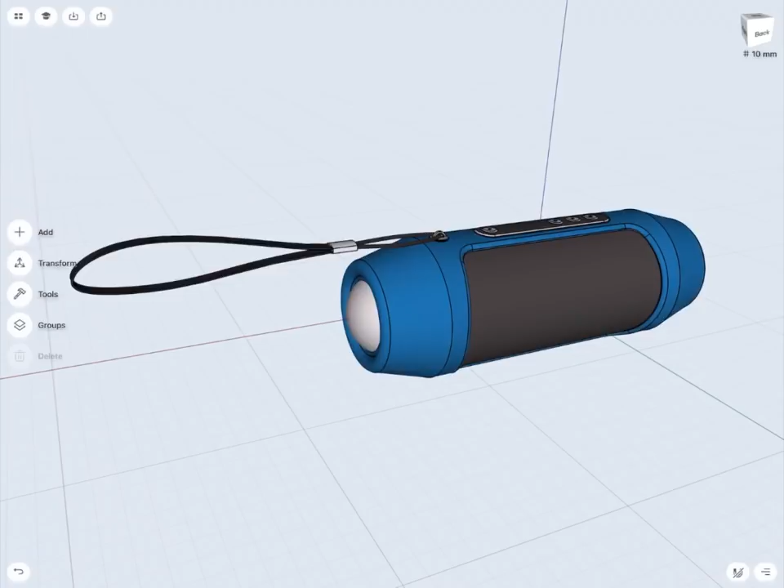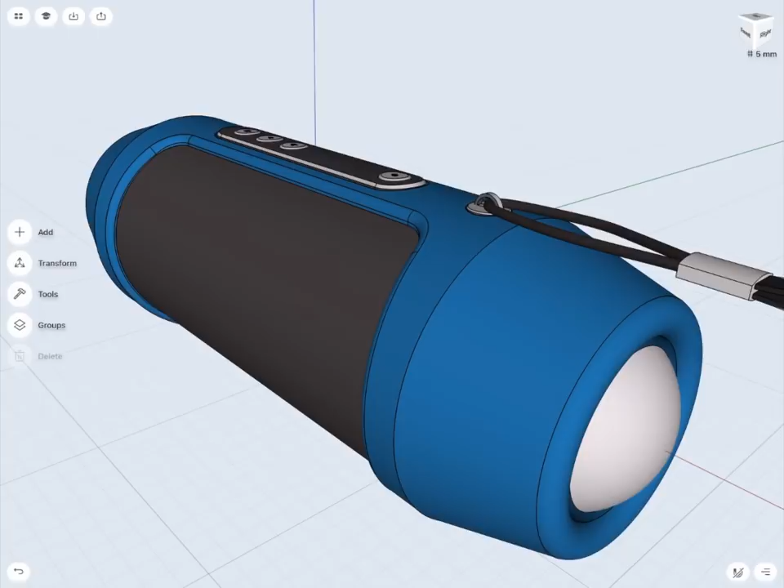We're going to go through a couple of stages and repeatedly use them to make different parts of the speaker: the speaker itself, a safety strap, and a control panel. We'll use extrude commands, revolve, sweep, and loft profiles on the sketches we make. We'll learn how to use a coordinate system to operate our design, and also use planes and modify them to draw sketches on them.

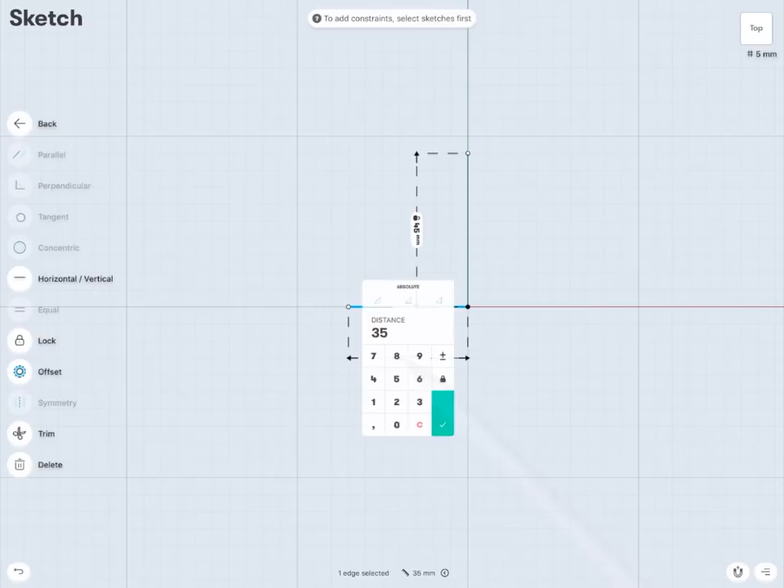Let's start. First we're going to open a new file and start to make our speaker profile. I'm not going to make a whole speaker, so I'm going to use the Revolve tool. Just half of it is enough.

You can use dimensions as I did, but you can also measure your own speaker if you have one at home and try to copy it. So basically all we need is just a quarter of our speaker, because it's symmetrical in two ways, in two axes.

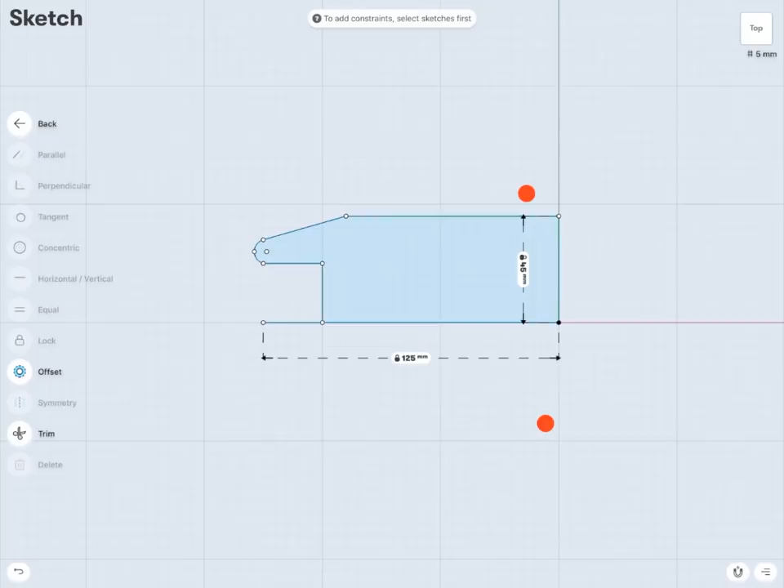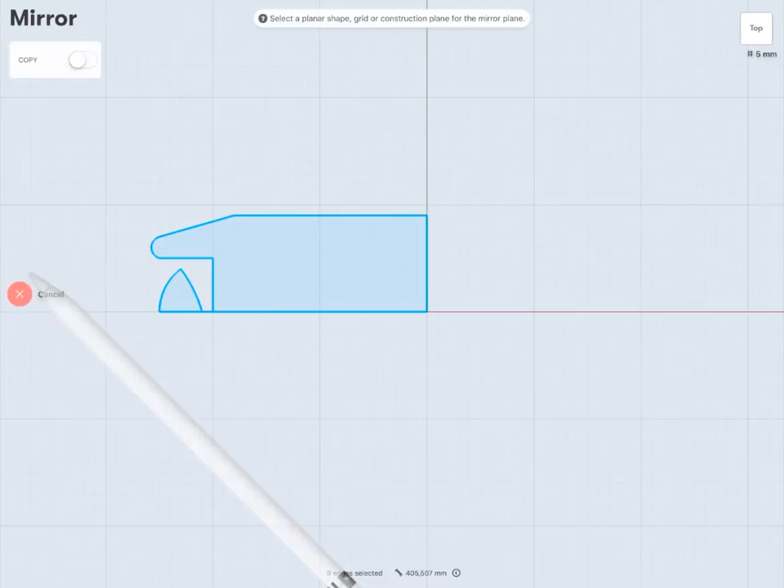The sketch I have right now is actually enough to start making the speaker. Now I need to make a mirror. Be sure to select copy from the top left box, as here. Now you can use the Revolve tool to make the shape of your speaker.

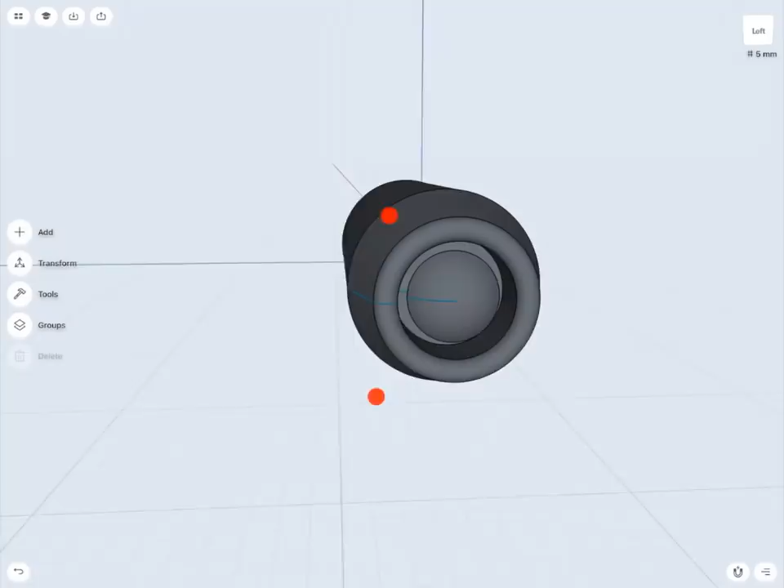So now we've got it. This is the basic shape of my speaker. I think my bass speakers are a little bit too small, so I will delete one and try to scale it a little bit.

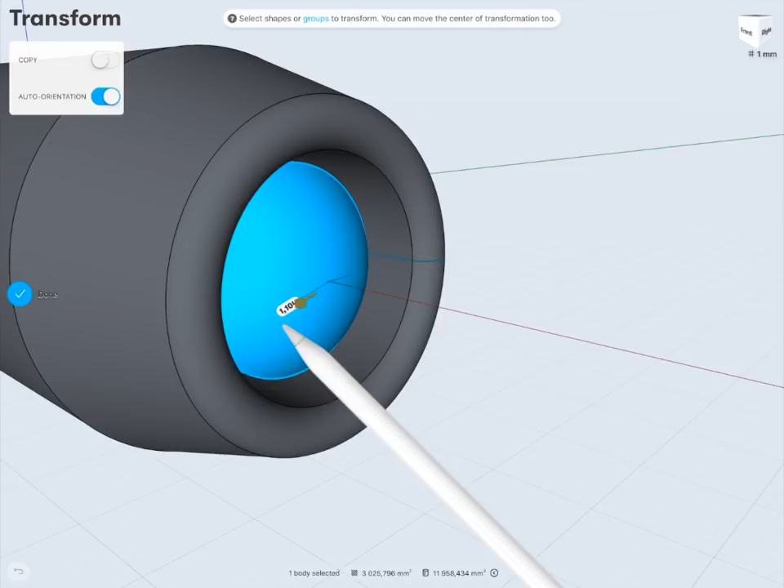I have to put my center of transformation inside my shape because it's round. Then I'm going to scale according to that point. This is important because otherwise you will lose your symmetry. I'm happy with that.

Now I'll create a line. As you probably spotted, I've put this line on axis, and this line helps me make a mirror of my bass speaker.

Now I need to put the bass speakers on a layer because I don't need it right now. If you want to rename a layer, you just need to swipe your pen to the left, and then you're able to change the name.

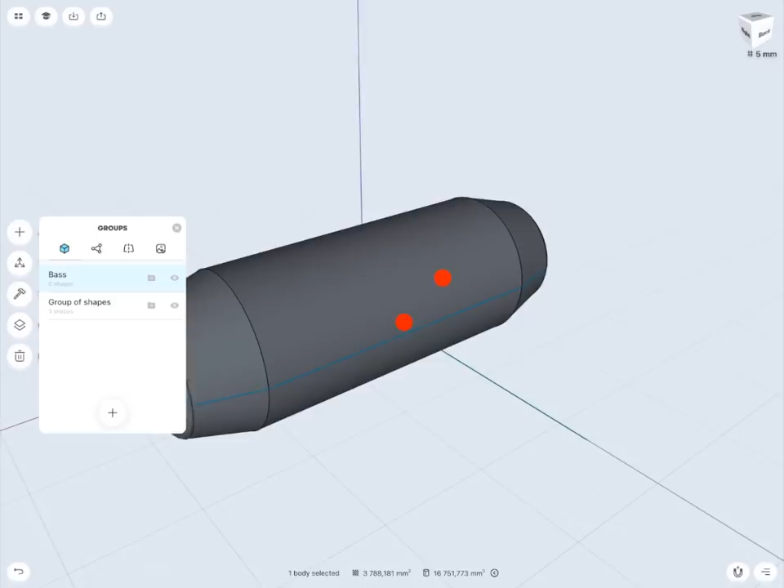For future purposes, I'm going to create a new layer, and I'll call it cut tool. So from now on, anything I create is going to be a cutting tool if I'm selecting the groups, for example. You'll see later how it works.

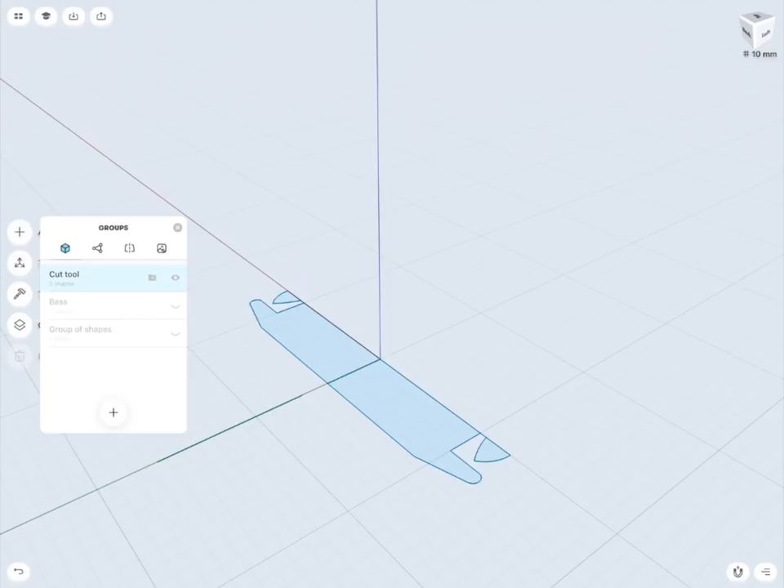Okay, let's start to create the speaker shape. This is going to be a profile of my speaker. I'm going to adjust it a little bit, and now I need to mirror that because I need it to be symmetrical.

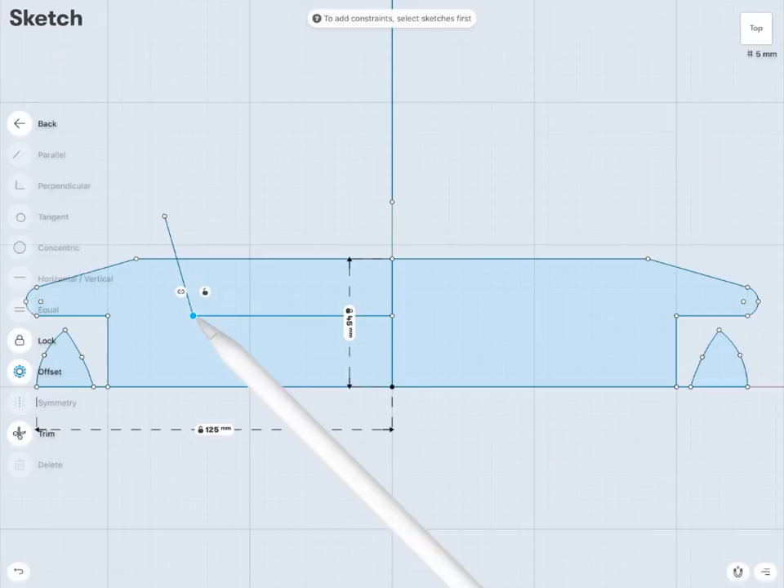Don't forget to select copy from the selecting box. Okay, we're done. Now I'm going to extrude that shape.

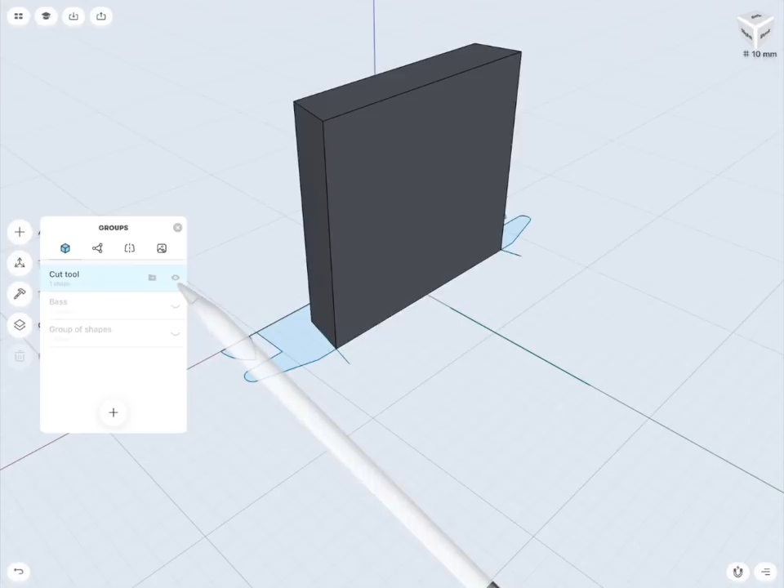As you see, it's placed on the cut tool layer. If I unhide my speaker, I'm going to use it as a cut tool to cut from my speaker.

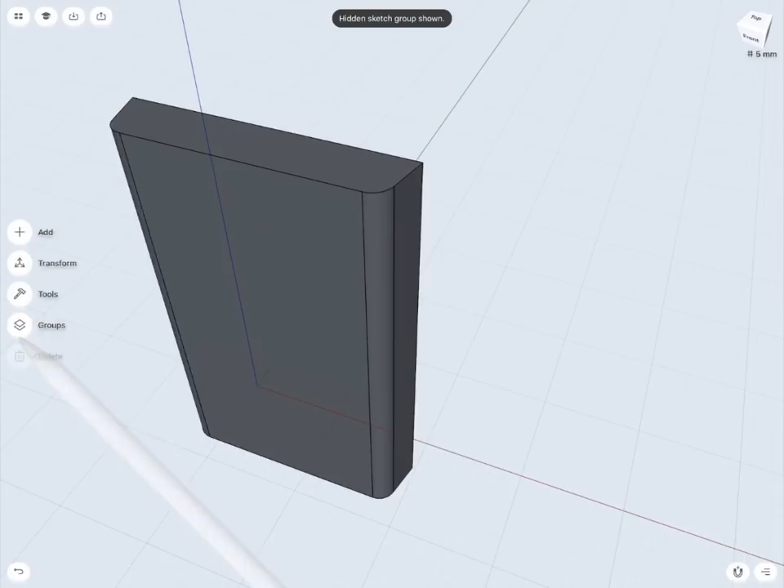I think I'm going to add a little bit of filleting because it's not that sharp. So I'm going to fillet that, and then unhide the speaker.

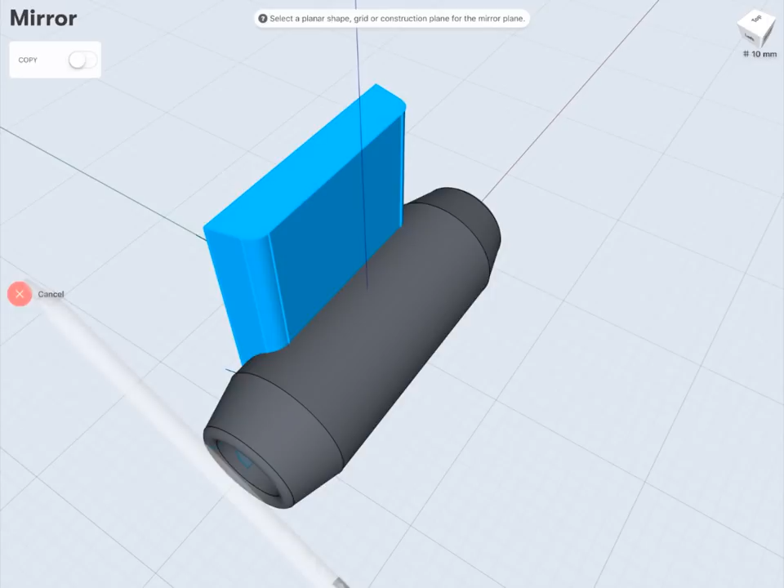Now I need to make a mirror to the other side of my symmetrical speaker. As a constraint to help you mirror this, you can use existing sketches or an existing line, as you see right now. I've used the sketch I previously made.

Now I can subtract, but remember: first select the object you are subtracting in, and then the object you are subtracting with.

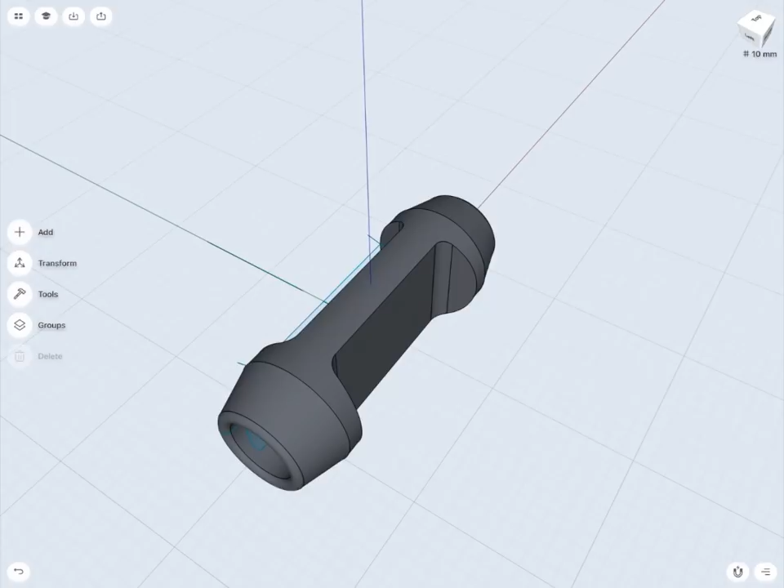Now I'll create the round shape to make it infill like a net of my speaker, aligning it according to the speaker. As you see, it's actually automatically snapping.

I like to lock the middle of my sketch, so to do it I just need to select the center of the sketch and then press the black lock. Then anything I scale, which I'm doing right now, will be according to that point. So extrude it, just press and pull.

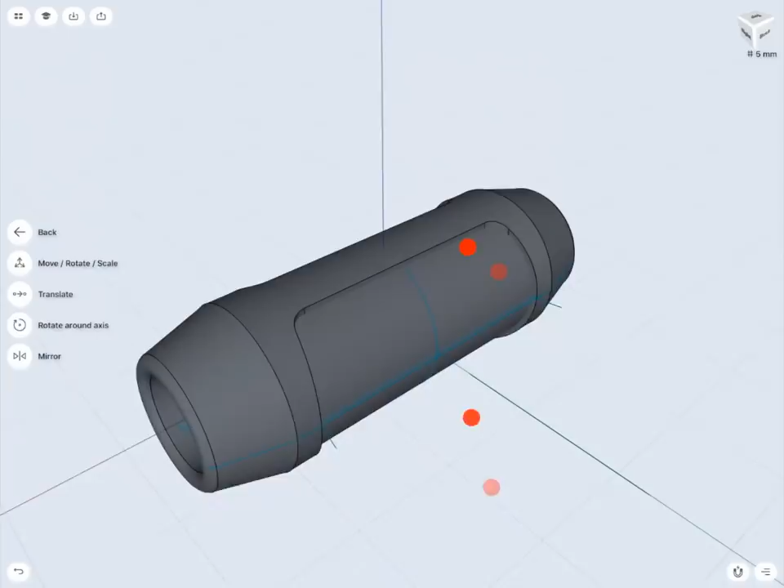Now I'm going to select the edge of my speaker and make small fillets. As you see, you don't have to select the whole loop, you just need to select one edge of it, and then the selection is automatically applied.

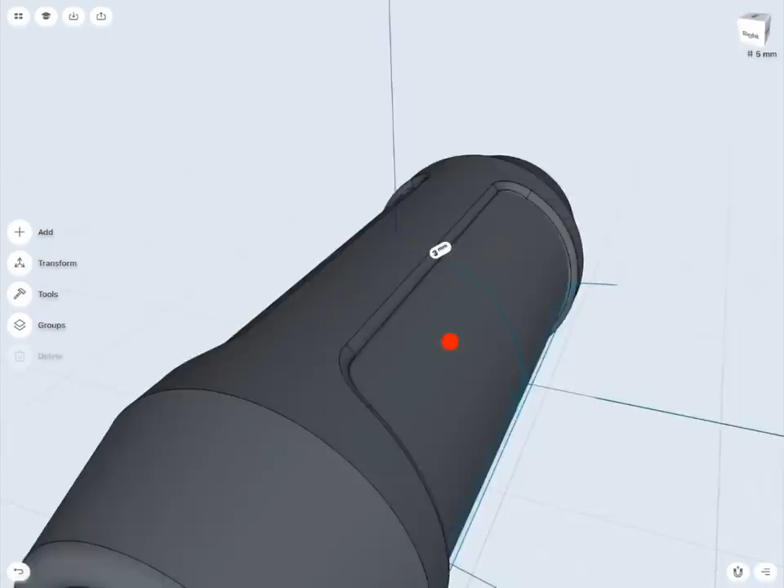So now I just need to merge them all together. To do it, I need to make a union, and now it's one part. So my speaker shape is done.

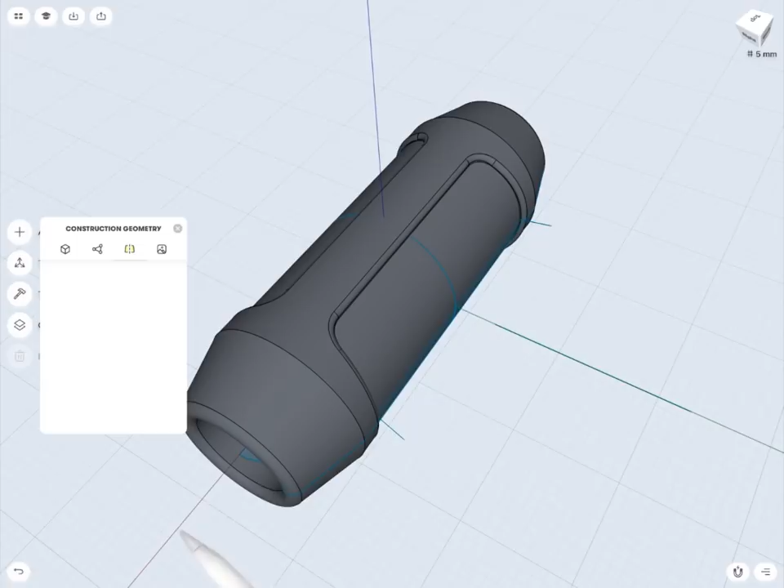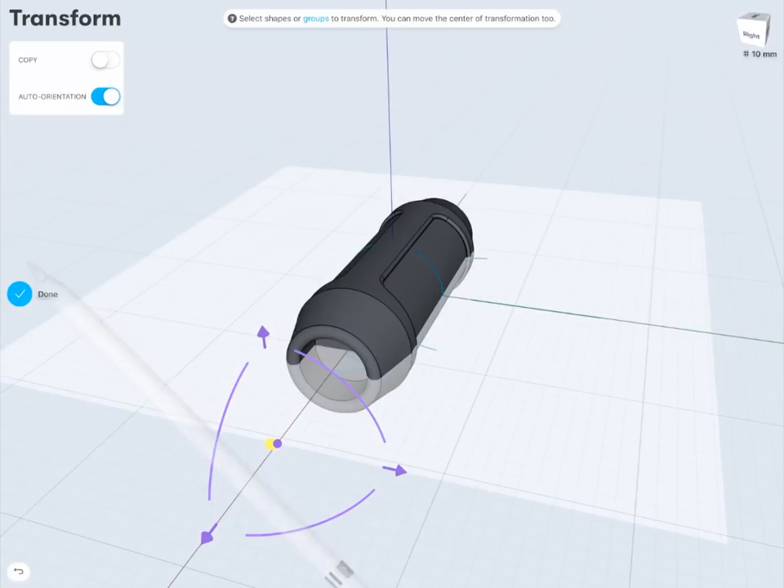Now I need to create a control panel. To do it, I need to create a construction plane. To do so, I will create the line, and out of this line I'll create the plane, and I'll do it through edge by selecting a certain angle. I like that feature of moving planes anywhere I like.

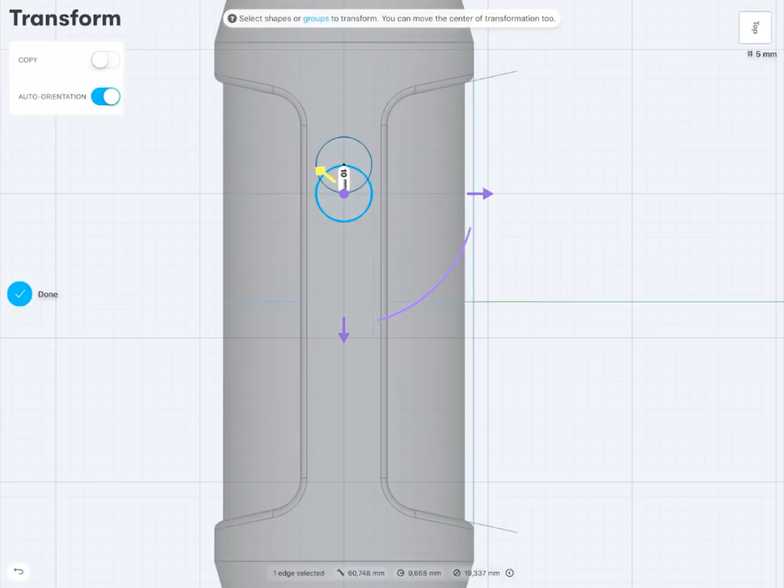It helps me to make sketches wherever I want. So in this situation, I'm going to place the panel. First I'm going to create the base, which is the very long bar, and on this bar I'm going to place 4 buttons, which is stop, play, forward, and turn on off. A little bit of trimming.

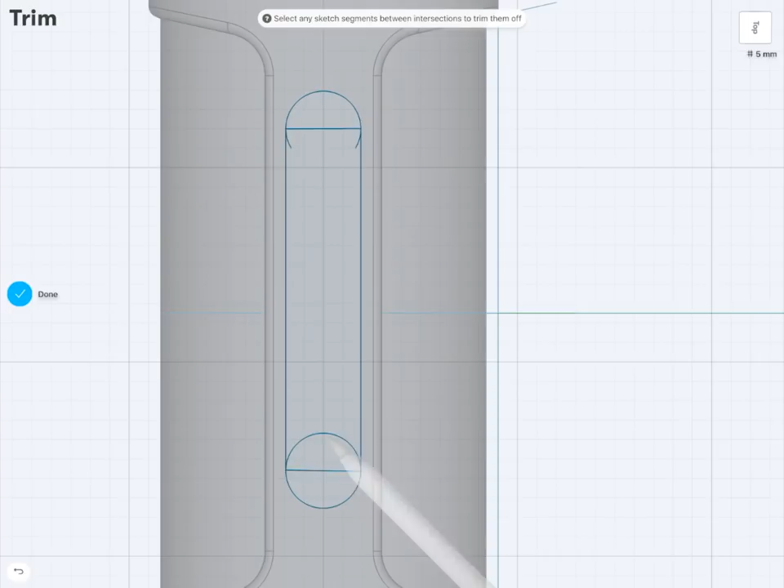So what I do right now is offset. I've created this shape, and I'm going to make a very tiny gap, which is a very technical gap.

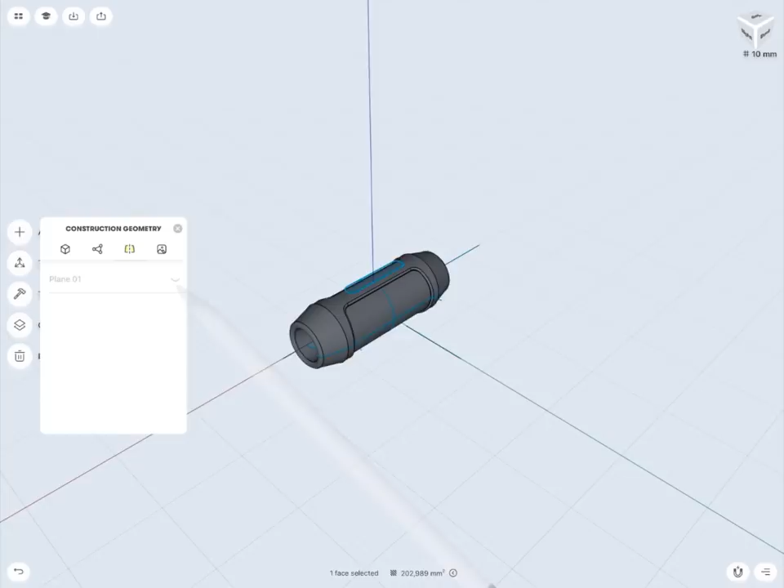And I'm going to extrude that, and I'm going to subtract it from the speaker. And then I'm going to adjust the height of the leftover in the middle bar, as you see right now.

So I'm going to select the face of the inside shape, and I'm going to pull it a little bit up to make it higher. At the end, I'm going to chamfer by pulling the edge using Apple Pencil.

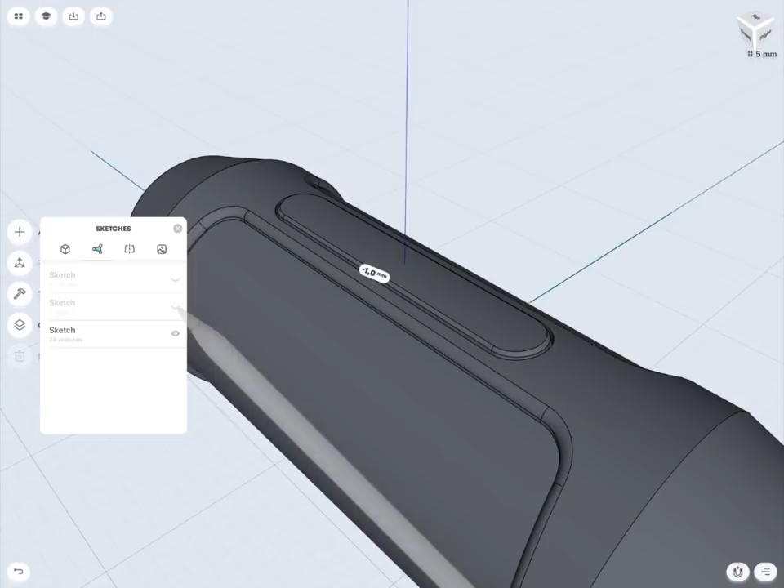I can't make a button sketch straight on the panel face because it's not planar, so I need to reuse a previous panel sketch.

I'm going back to my sketch to add some more shapes. I'm going to create a round shape, a circle.

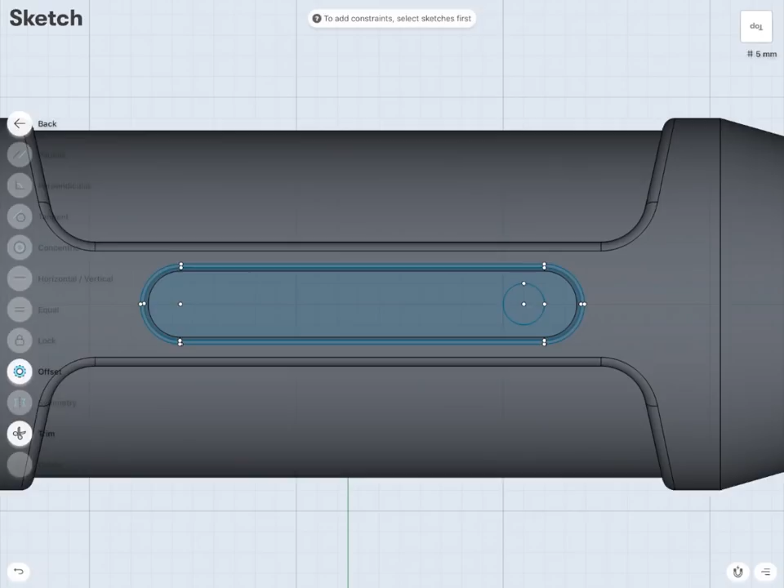I'm going to copy them 4 times according to the same gap, and I'm going to make an offset to create shapes which I will use to make technical gaps.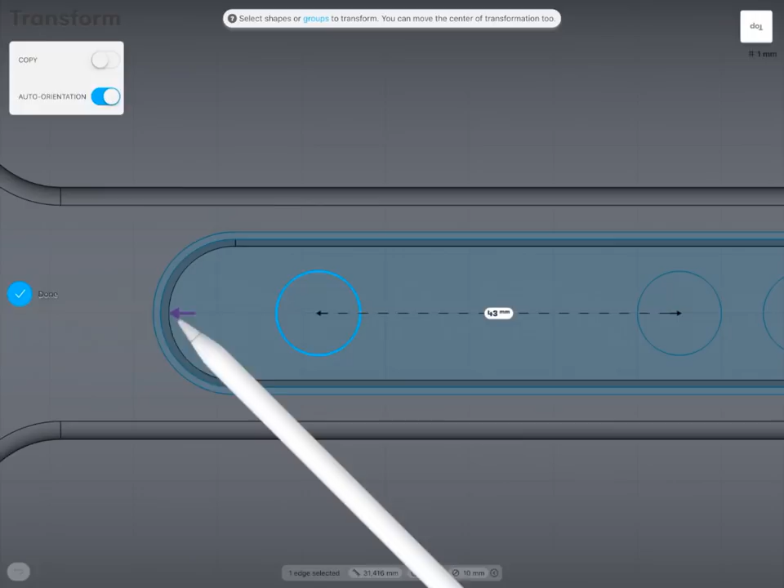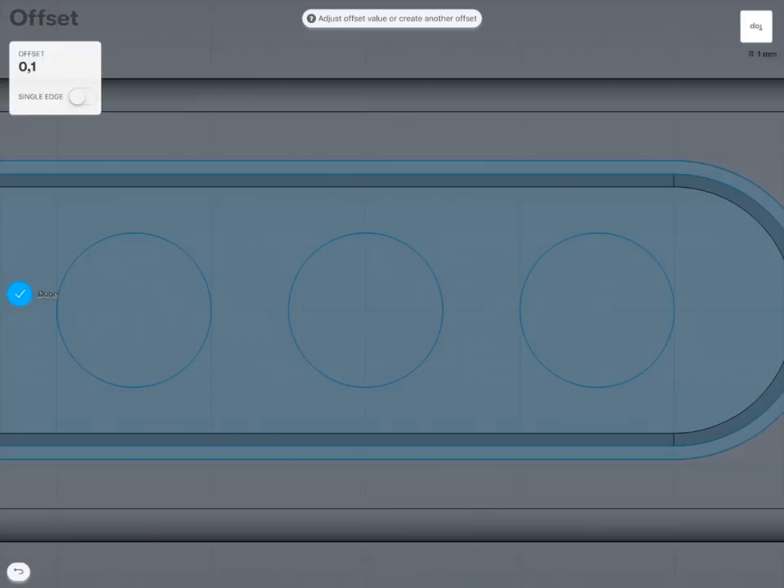So most of the commands, as you see right now, have this number box on the left top corner where you can place your specific dimension, very accurate if you need it. And this will actually keep your design as you want it to be, and very precise.

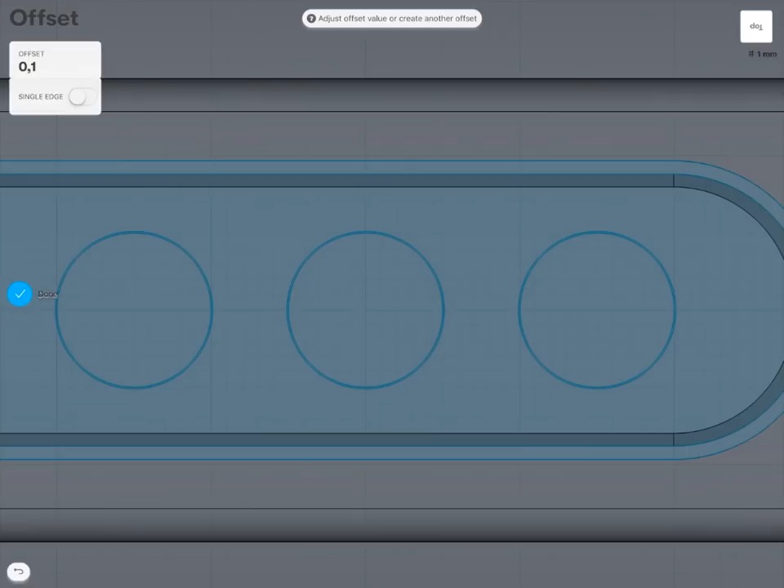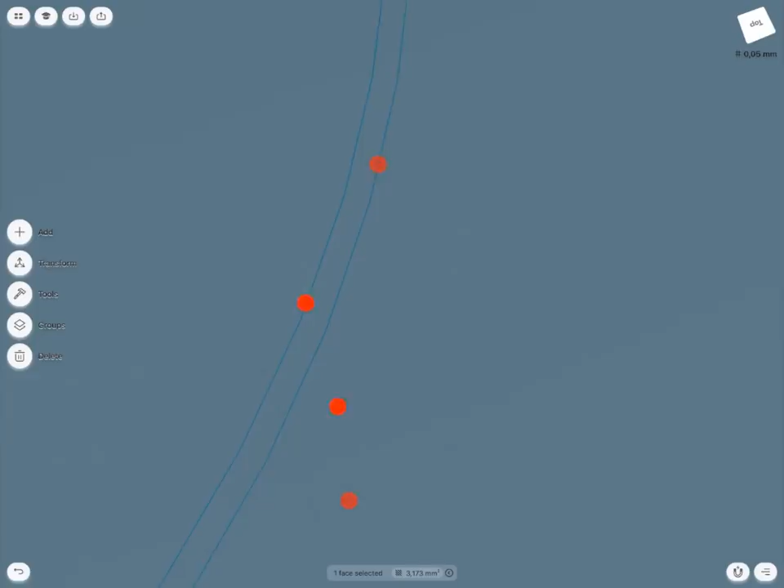So another feature I like in Shapr3D is actually zooming. I like this two finger zooming. You can zoom in very close to the objects you actually want to select, and then zoom out and actually move at the same time. And you can do it very quickly and very efficiently.

So as you see, I'm going to extrude it right now, the same as I did with the bar. Anything I've created is on a top layer, which is the cut layer. Now I will show you how to cut using groups.

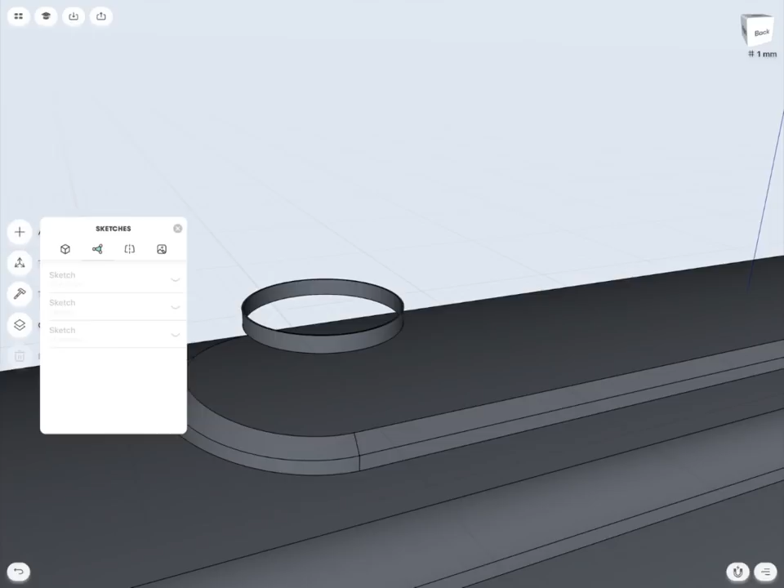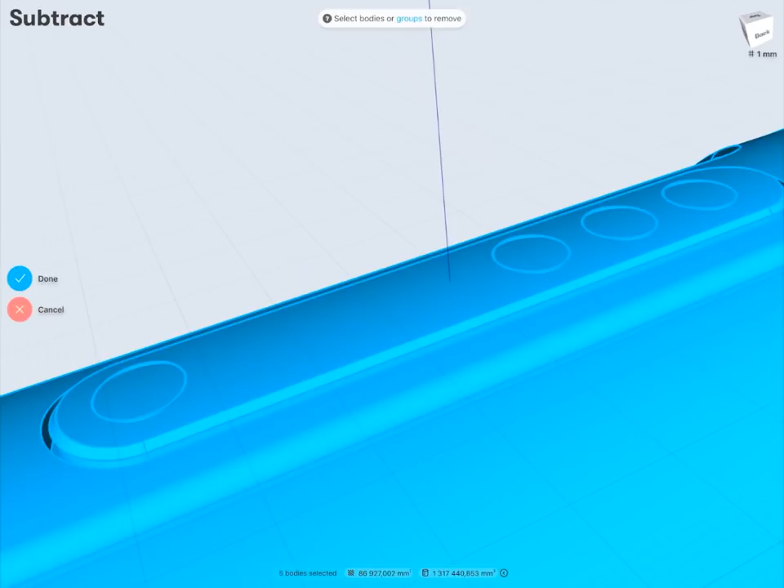So I need to transform these shapes a little bit towards the bar. I've actually used the group to select that object, and then I'm going to subtract, and as you can see right now, as a cutting tool, I'm going to use the cut layer, which is a layer that contains any cutting object.

And now if you get closer, you see what I've done. It's a small gap between the button and bar. And now I'm going to select the edges of the buttons and make a fillet.

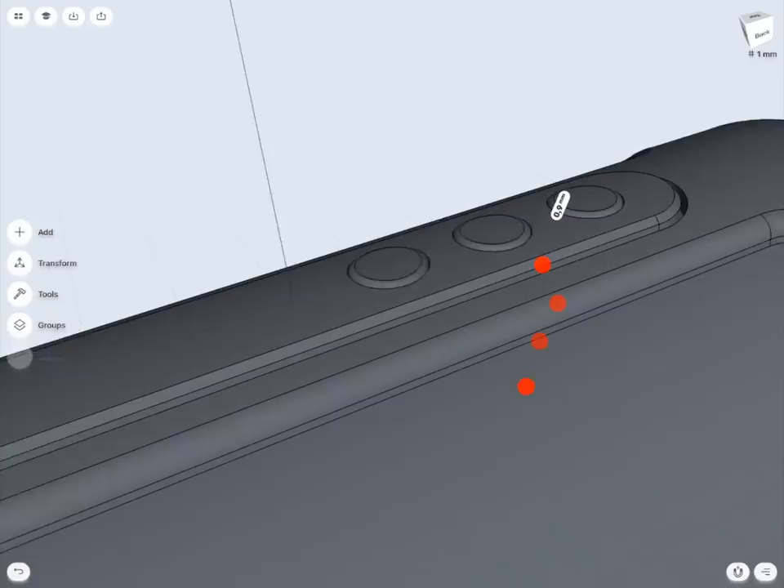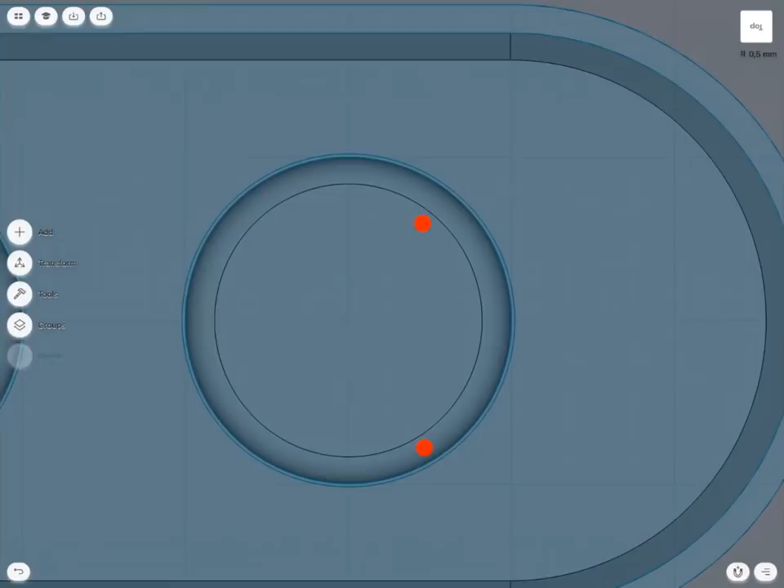So I'm going to recall my sketch, which I've been using to make all of this design. Actually, you can make the sketch in one go at the beginning of the process, but sometimes I prefer to follow my imagination and do it one by one, as you see right now. But it depends actually on you.

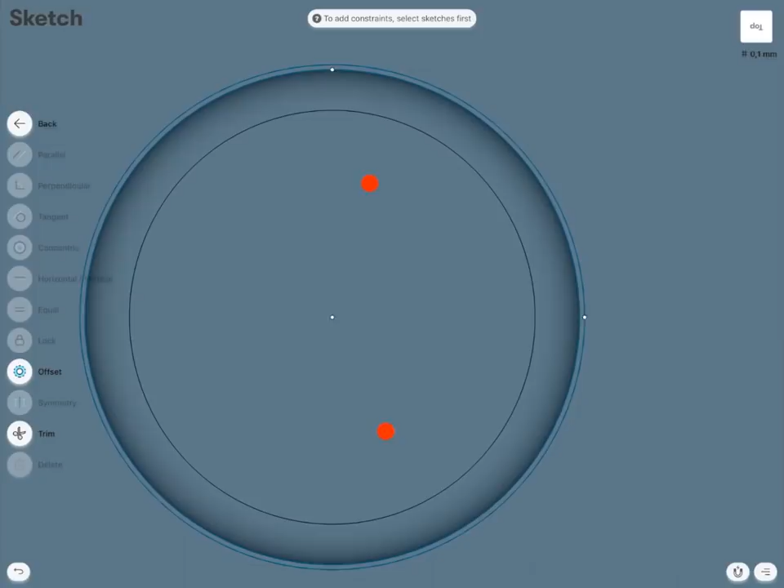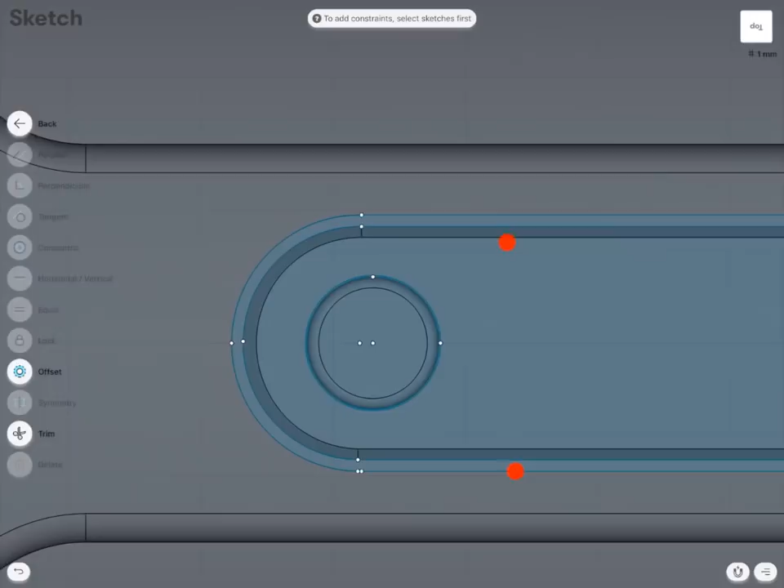So now you see how easy it is to sketch just simple geometry. If you have your snapping on, it's just drawing. But if you see on the right bottom corner, there's like a magnet logo. You can switch it off if you need to make it more freestyle.

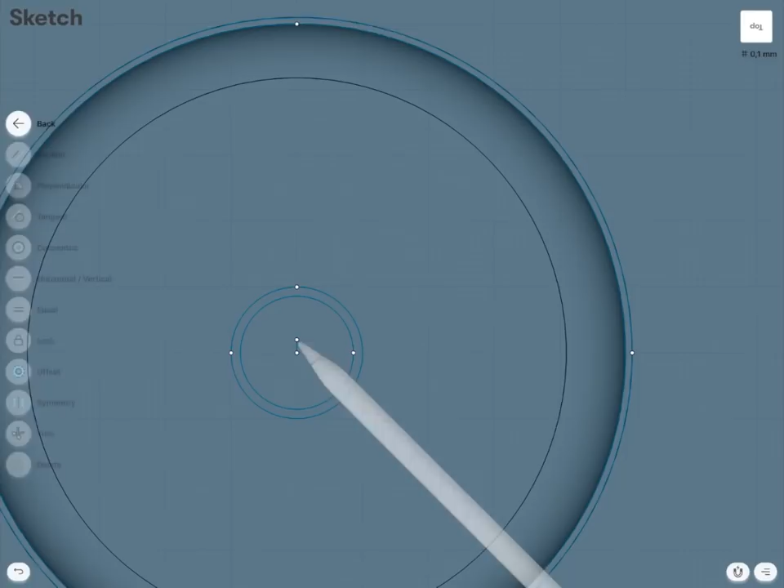So basically the sketching is very easy because all the time you're using the same tools, which is creating line, creating arc, trimming, offsetting, and basically this is it. Sometimes you're making mirrors, but this is from the transform tools.

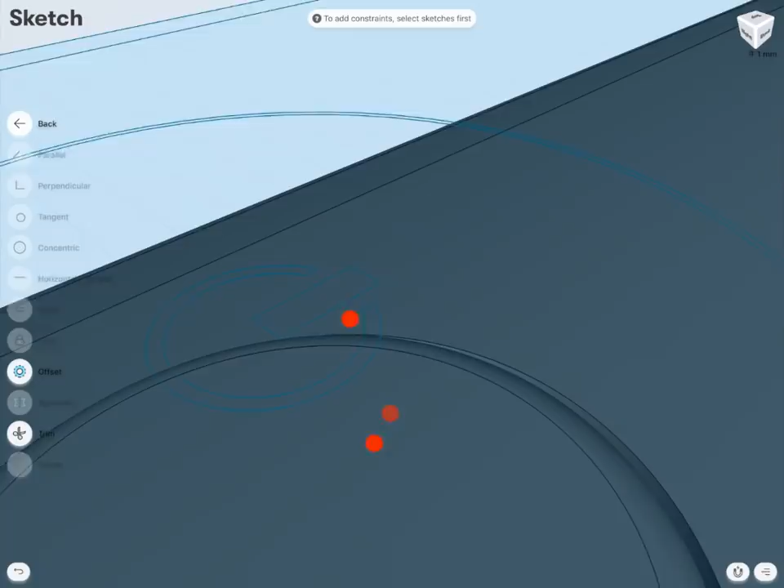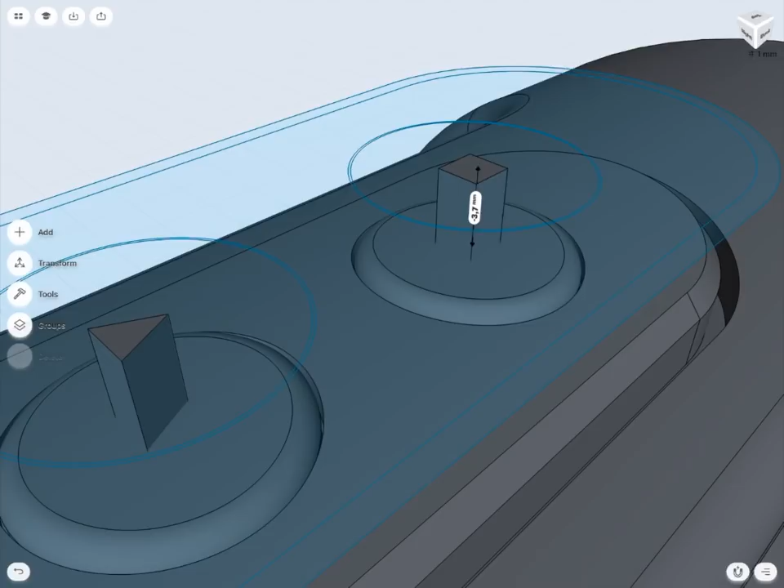So I need to select anything I've created and extrude it just by pulling. You just hold with your pen on the screen and pull down, and this is going to be extruded. Also, as I mentioned earlier, anything I've created right now is placed on a cut tool layer.

So now if you're subtracting, you just need to select the group from the top, as I did it right now. So it's done, it's so simple. Okay, the panel tool is basically done.

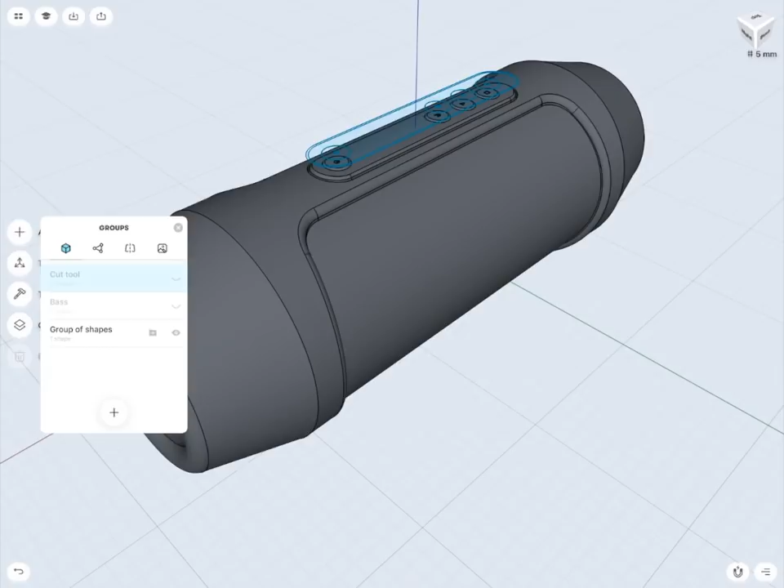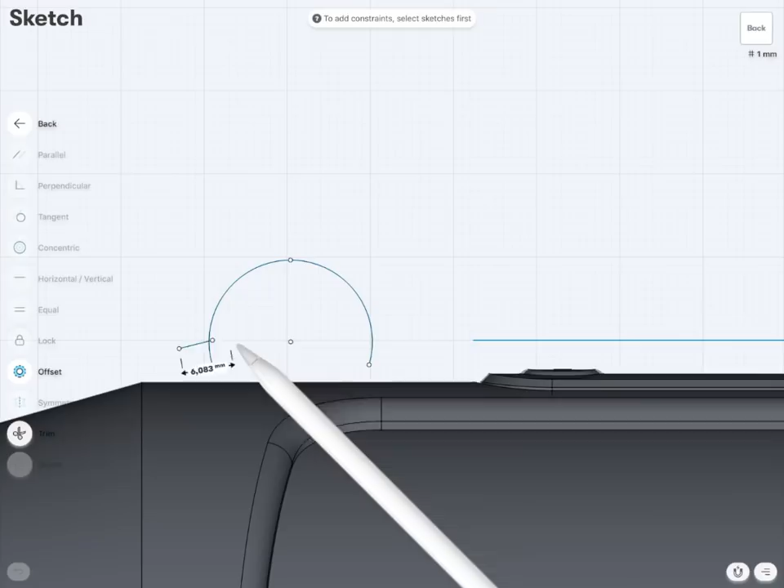So now I need to create a safety strap. To do so, I will use the construction plane I've already used before. So now I'll just rotate this according to zero point, as you can see. And now I'm going to double tap on the plane, and create the profiles to make the mounting strap solids.

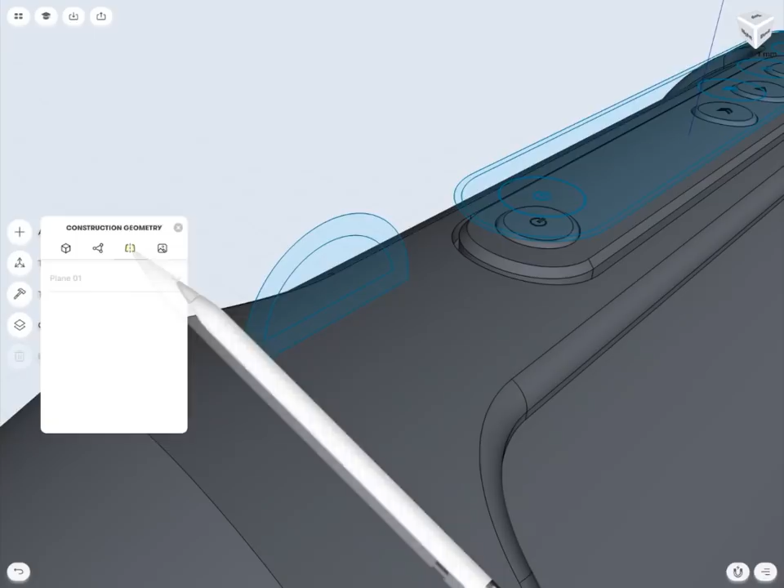Basically anything I'm doing right now we already did on a previous design. So in a kind of conceptual process, I don't care to be really precise. I prefer to do and then to transform.

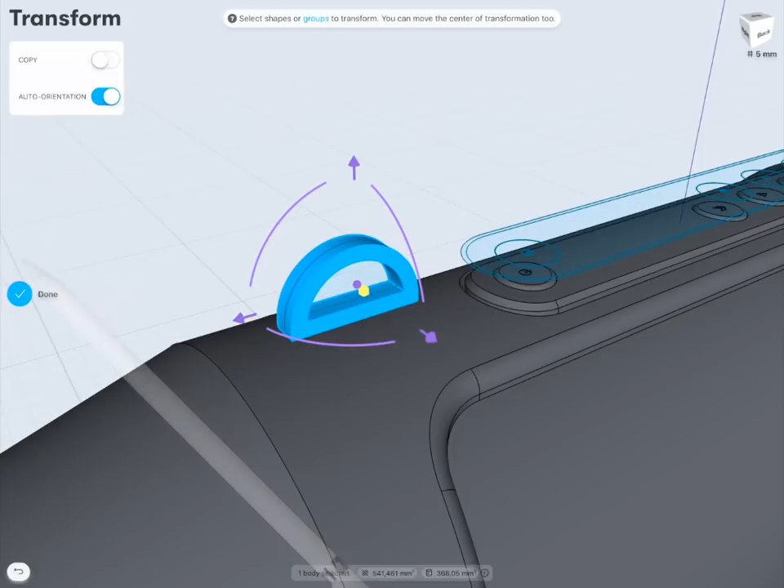So as it is right now in this situation, I create this mounting object, and then I'm going to transform it a little bit. So you can do it anytime you like. As you see, it's a little bit too big, so I'm just going to scale it according to the center point of the edge, the middle point of the edge.

So I like to do it because it kind of frees my mind. All the time I need to change something, I'm just doing it.

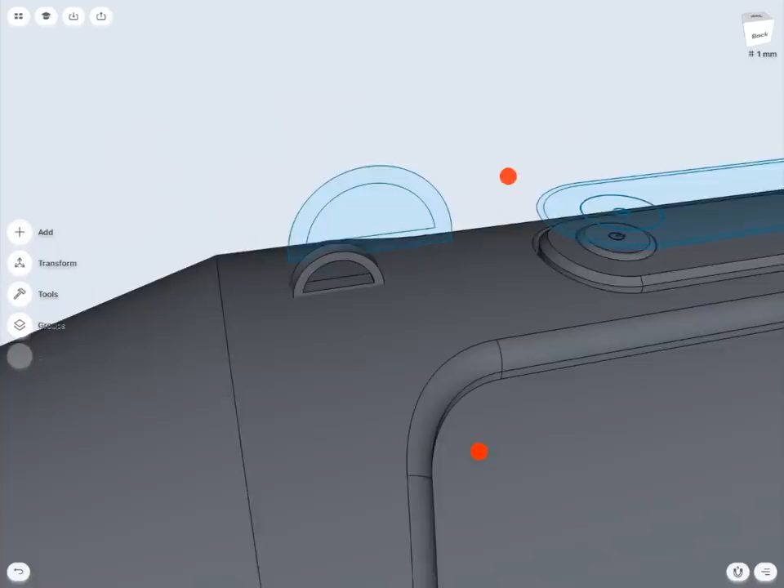So now I'm going to create the base for this mounting hook. This is going to be similar to my buttons because I want to keep this design the same.

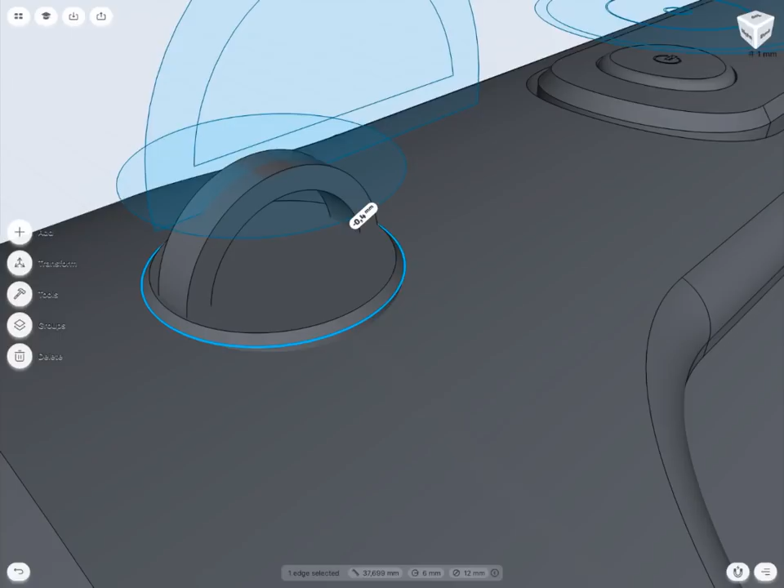As you can see, you can do it a different way, but I like to keep the gaps as is with the panel. As I told you, it makes this design look much more realistic.

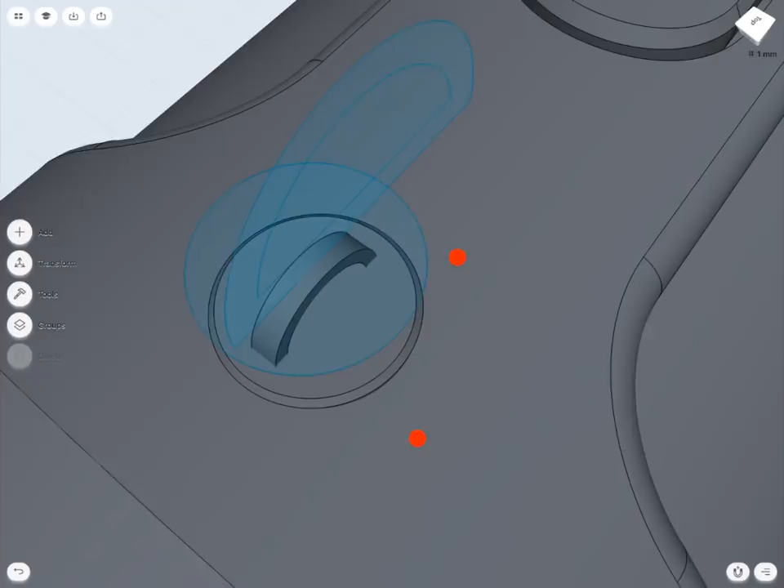And yet again, I think it might be a little bit smaller, so I can just transform that according to scale. And now I'm going to create the gap, which I first need to create the offset, as you see right now.

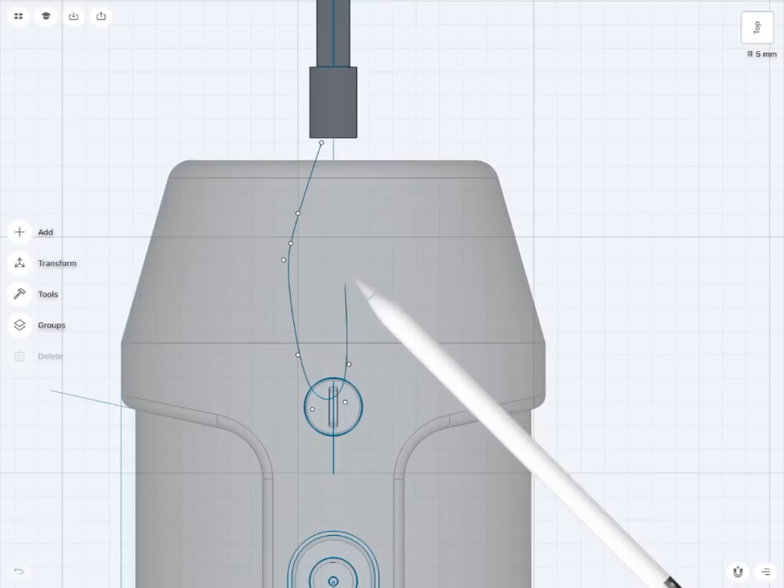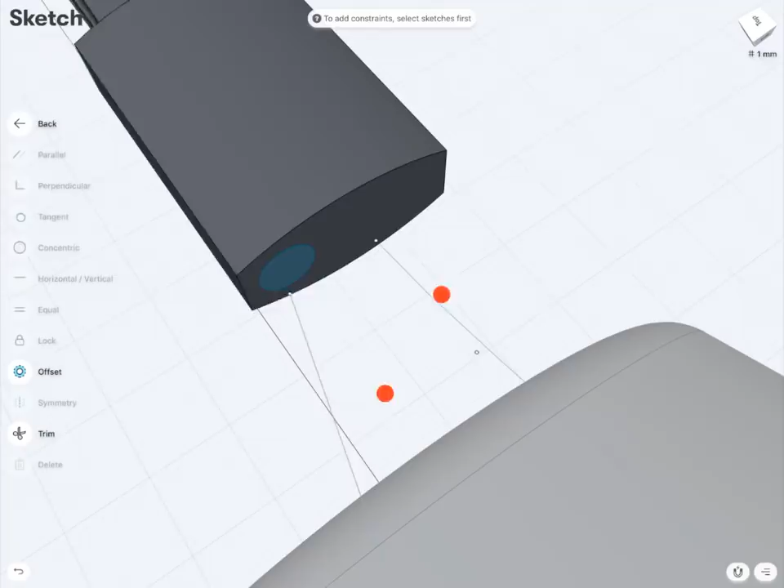So you don't have to worry very much that the plane wasn't at the same level as your strap button. You can adjust the place of your strap later using the transform tool and move it to the place you want it to be. And again, sweep tool.

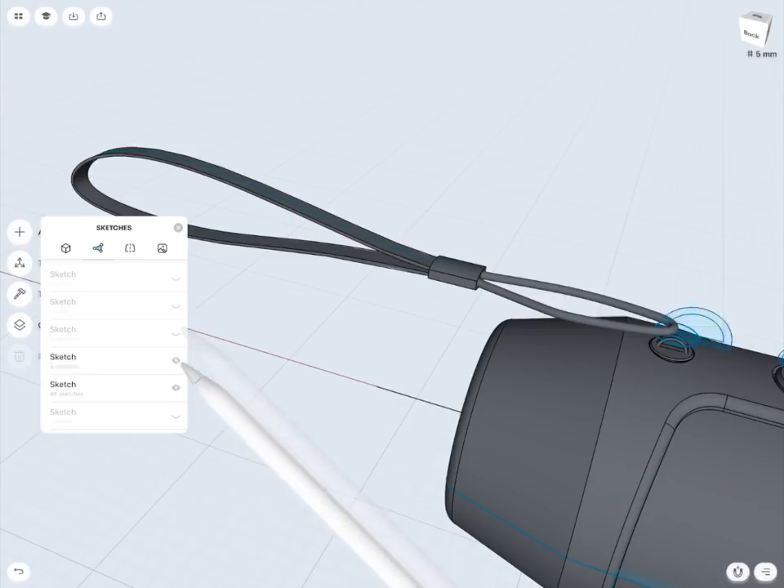And a little bit of adjustment. So I decide to transform all of the objects a little bit towards the mounting. But you can also, in this case, rotate.

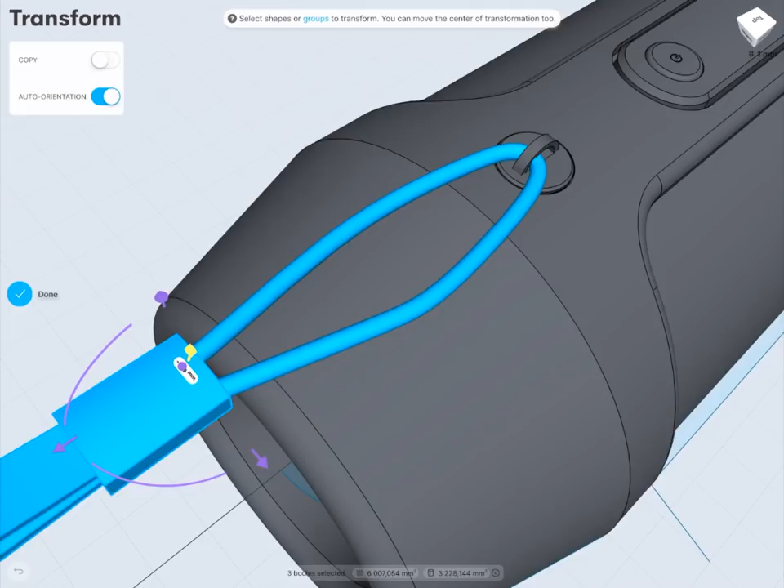You can change the rotation point, the purple dot of the coordinate system, and then try to play with this a little bit more. Okay, it's done, it looks great.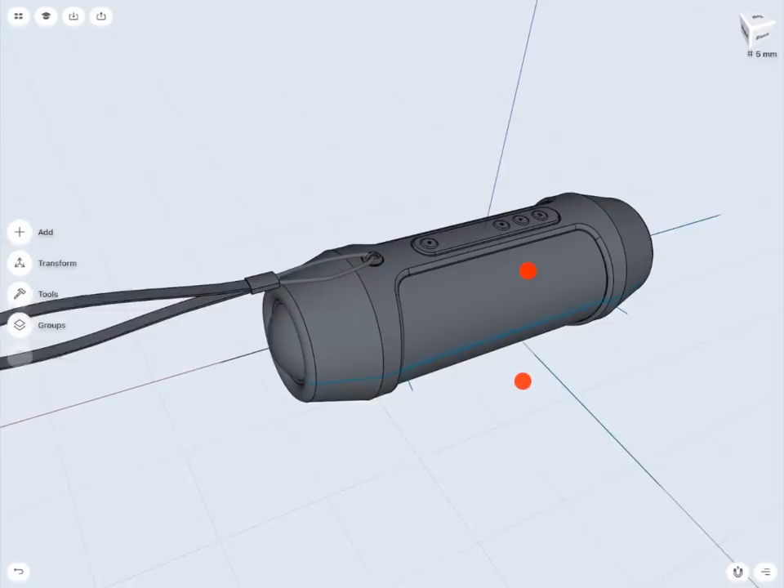And it's time to put some colors on my design. So in this case, when you're just making the small technical gaps, your design is all one piece. So you have to first select the outside general color and then go into details by selecting each surface separately.

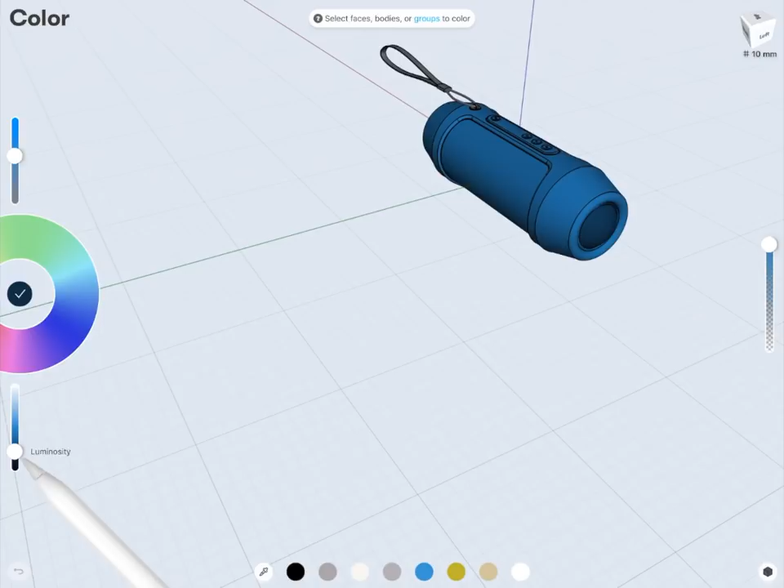So this is my color version. You can use your own. You can play a little bit more with the palette, and then you'll see how it looks.

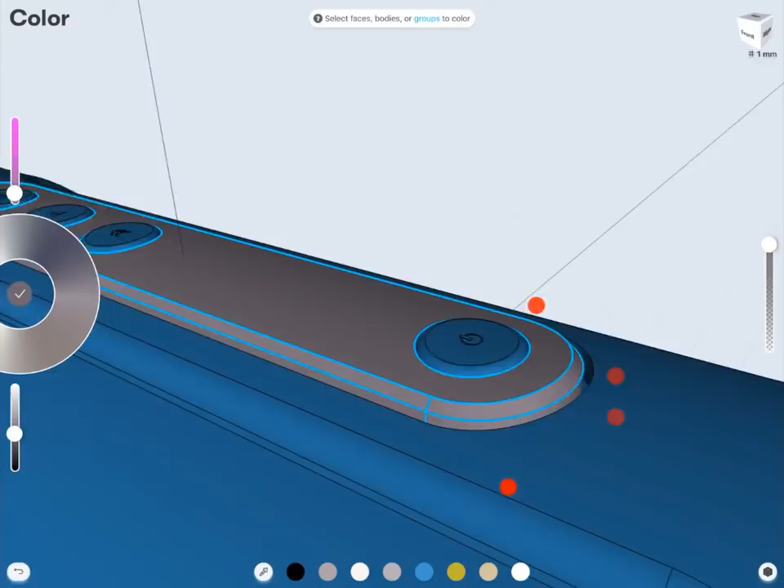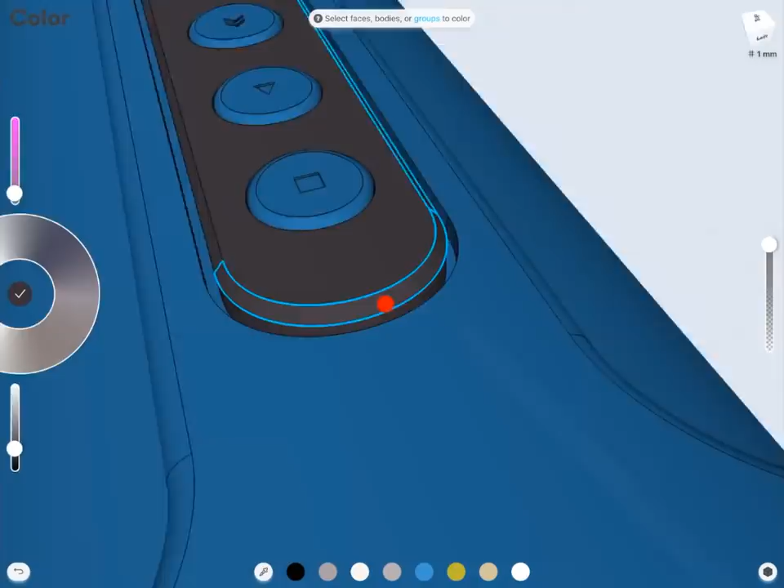So remember, the edges are always reflecting the light, so I'm putting the white color on the edges. It actually, in this case, gives it a more realistic view.

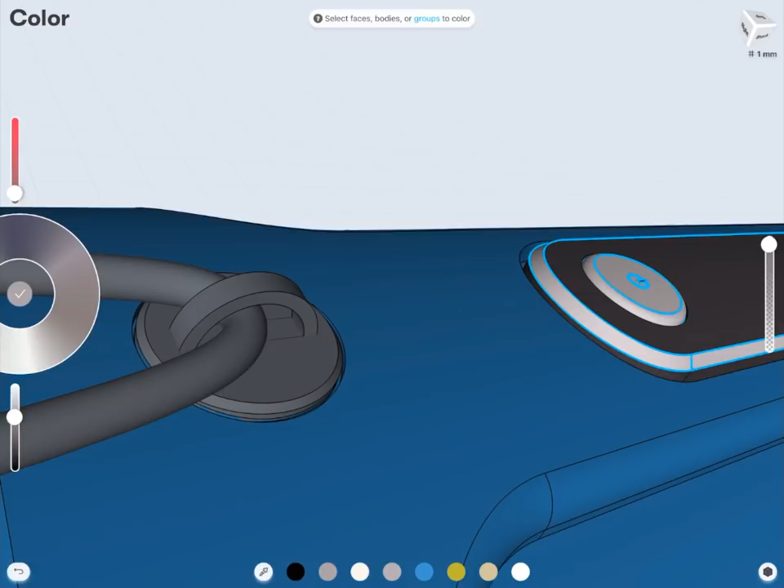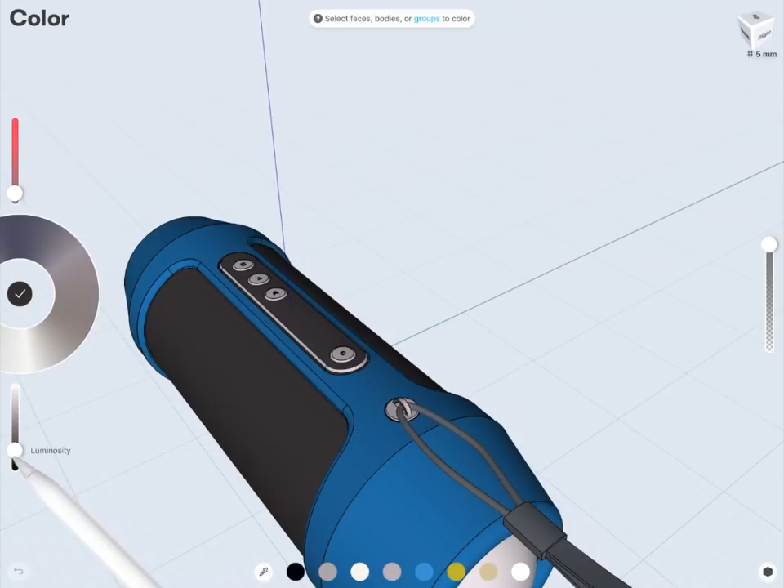We've done a great job in this lesson. As you probably spotted, we have been going through a couple of important commands and operations, which, when you're creative, you can use anywhere in any design you like. It's just a matter of your imagination.